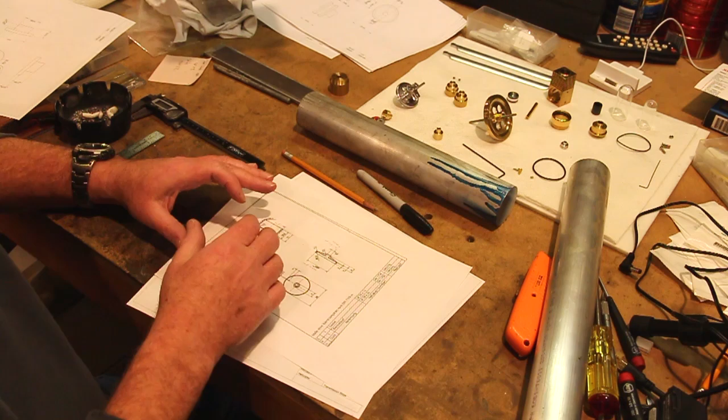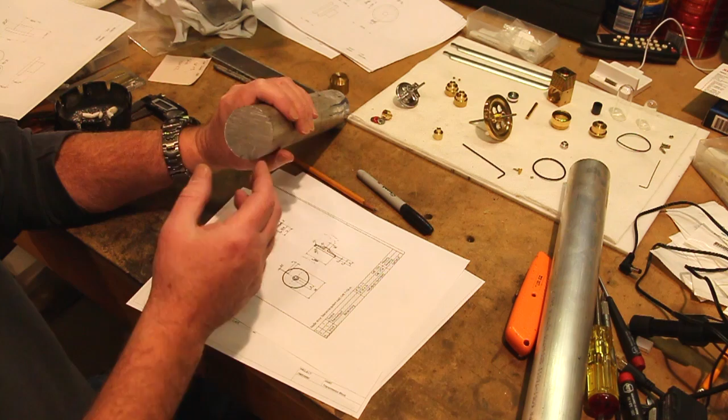The next thing I think we'll work on is a little pot that contains the isopropyl alcohol, which causes the heat, which makes the engine work. The last time I made one of these for a different project, I started out with a big, thick block of aluminum, and I bored out like 90% of it to make a dish. It's not going to be very big. But anyway, you're removing, like I said, about 90% of the material.

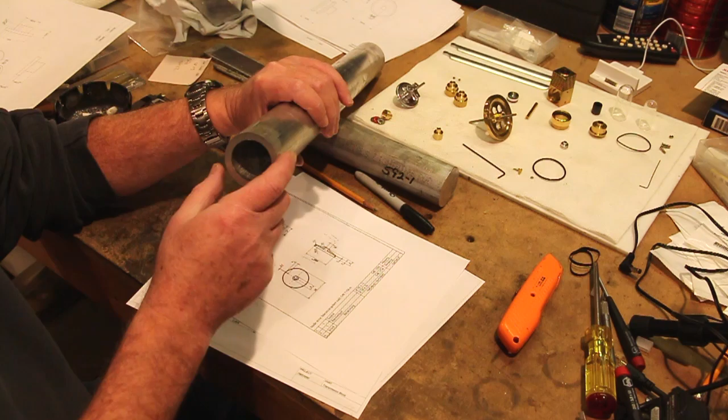So this time around, I have this cylinder, a large length of it, left over from another project. And what I'm thinking is to use this instead for the main body. But then, of course, you need a bottom on this thing. So what I'm thinking of doing is cutting a slice off here, and making it such that it fits and plugs the bottom of this, and then facing it and so forth. So anyway, we'd have a bottom.

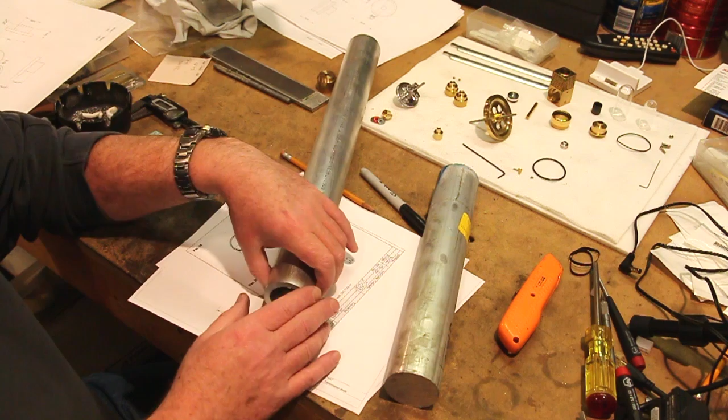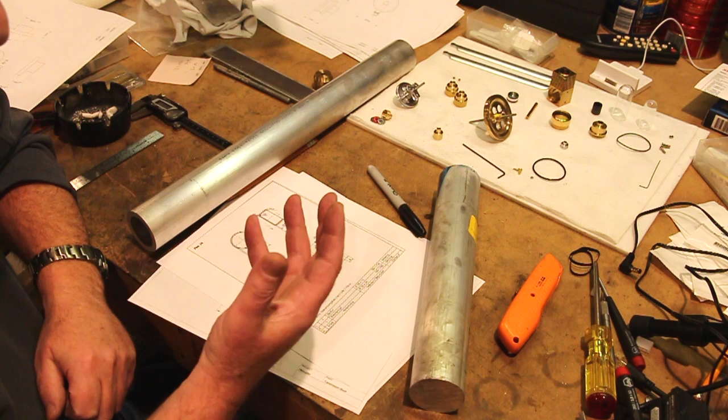And then when that's all done, assuming that all works, we have to make a top. The plans call for the top to have a bit of an upward taper to it. So I would make that out of this as well. And then, of course, there's a hole drilled through it where the wick comes up. So let me cut some of these down to size on the bandsaw, and then we'll head over to the lathe. And this is sort of just going to happen. I don't have a real plan in mind here, but sometimes I just work that way. So let's go see what happens.

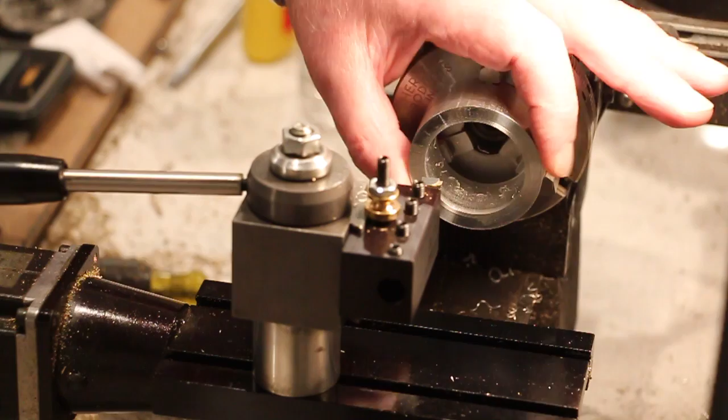Okay, I'm starting with the tube that will end up being the main body of the cup. I've faced both sides of it to make it square. And now the inside of this is the rough mill finish, and we don't want to leave it that way, so I've put my boring bar in here. And what I'm going to do now is just clean that inside surface. And the way I'll do that is I'm just going to jog the bit outward toward the edge until it touches. Just right there.

And now what I'm going to do is just make a few cleanup passes in and out. We'll use some cutting fluid. I'm going to jog out about, let's try 4/1000ths on the first cut. Now that's 8/1000ths off the diameter.

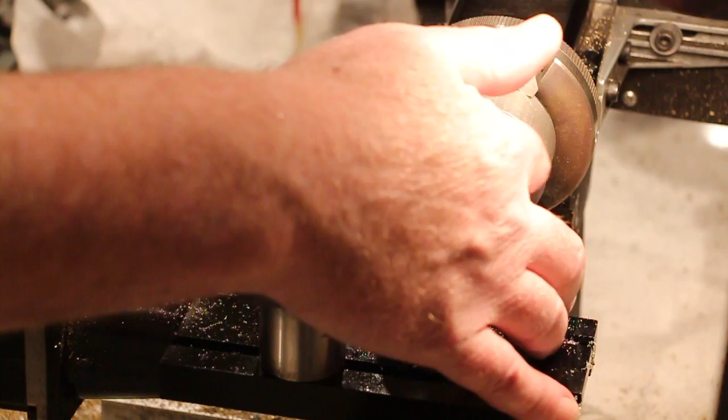Yeah, now, I doubt you can see that, but we have again removed some more material. It's just a little bit, but if you were trying to get a very tight tolerance, spring passes are removing, I don't know how little they're removing, but they are removing material. All right, well, that's certainly a nice enough finish for the inside of an alcohol pot.

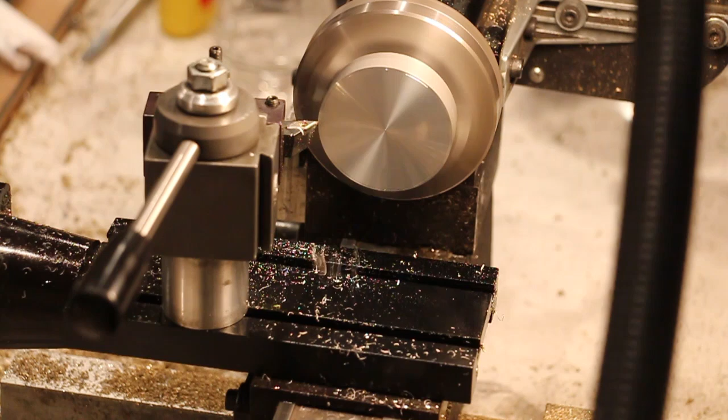So I guess the next thing to do is measure that inside diameter. Because what I'm thinking of doing is, for the piece that I'm going to use for the plug to make the bottom, we'll machine a shoulder into here and bring that down to the diameter that just force fits itself into there. And then we'll just press fit these together, probably with some epoxy. And then once that's done, we can remove all the excess, because we don't need a bottom this thick. I just needed something to hold on to. So let me take some measurements, and then I'll put this piece in, and I'll face it, and then we can start cutting the shoulder that'll fit in there.

All right, I've faced off both sides of this blank. That's going to be the bottom of the pot. And I've switched over to my turning tool. And then what I'm going to do is jog in just until I touch the face there. I'll set that as Z0. Now what I'm going to do is touch off in X.

Which is right there, and I'm going to mark that as X2 because the nominal diameter of this blank is 2 inches. What I'll do now, as you've seen me do before, is turn this down until it's round, then take a measurement and set the DRO to where we really are.

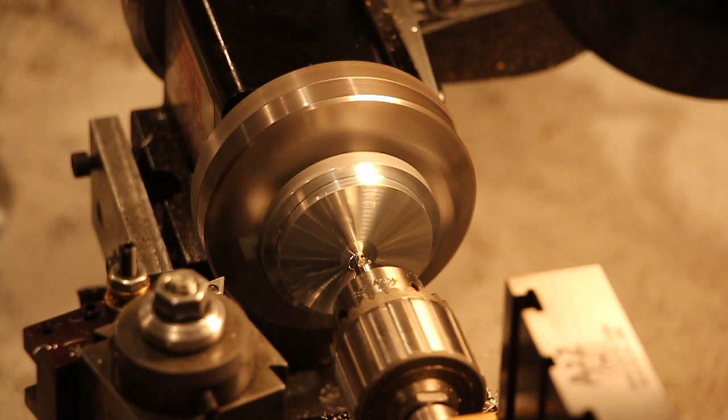Snug. Which is better than the alternative, being too loose.

Looks like we're about, I don't know, close to about 8 thousandths too big. So let's see what we can do about that. Alright, that's where the G code thinks we left off. So just take off a couple of thousandths.

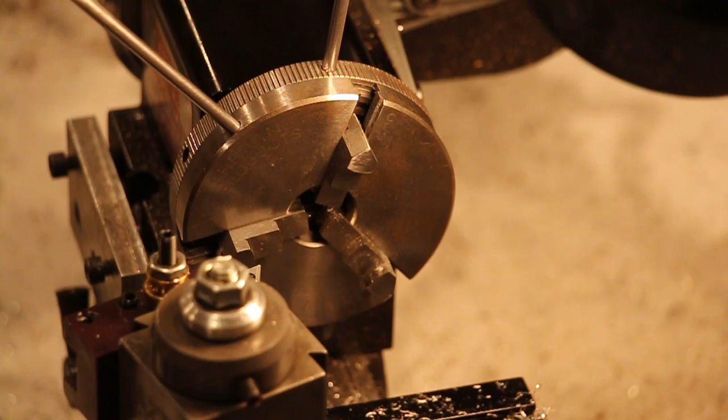Turning it down to about there, which is minus 1.12. This is just seat of the pants metalworking here. Just finding X here. Touch off. Right there.

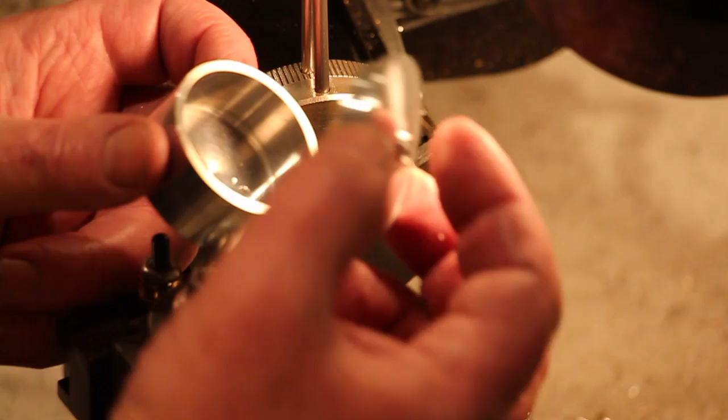All right, well, it certainly looks a lot more delicate, if you will. I still haven't decided if I want to make it just a little thinner than that. I mean, at this point, we're talking just totally aesthetic. And no one's ever going to see the inside because there'll be a top on here, so yeah, we'll probably just leave it like this.

All right, I'm still deciding what to do next. The thing is way too deep, and I'm going to have to cut some of that off. And then obviously we've got to flip it over and remove this big hunky chunk from the bottom. I think I'm going to need some time to stare at this and think about what to do next. So hang in there, I'll get back to you.

After thinking about it, I decided the best approach is to first remove this big chunk here from the bottom by facing that off, and then sanding the part. And because we're using the reversible jaws I mentioned, when they're in the reverse position they don't mar the finish. We can take the sanded part, flip it, and then remove the excess depth here. Then that should finish this piece, and then we'll go make the top for it.

So this will take a while, so I'm not going to make you sit through it. I, on the other hand, do have to sit through it. So I'll bring you back when we get through that. All right, I removed the big chunk that was sitting here. What's left now?

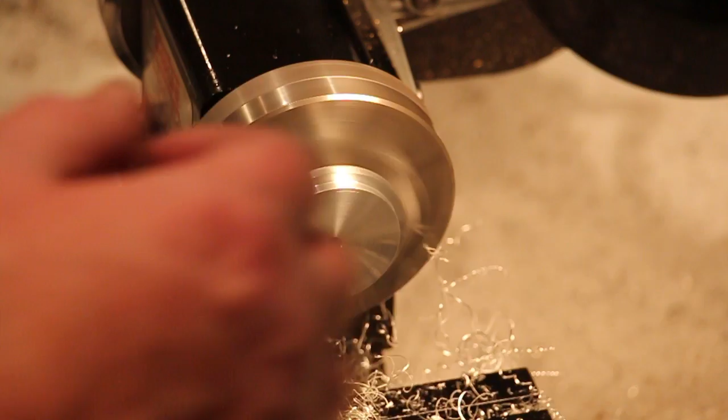When we made the plug for the bottom, we cut a step into it and recessed it into the tube. But there's still a fair amount of meat here that isn't serving any purpose. So I'm going to remove a tenth of an inch from this.

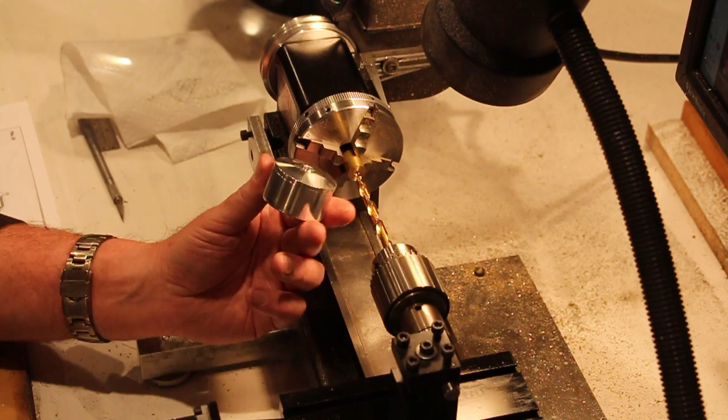All right. Well, the cup that holds the fuel is finished now. It's all sanded and stuff, and it's funny, I don't know. I look at this, and I remember how much stock we started with, and it's just incredible what we went through to get down to this little piece, but anyway, it looks nice.

So what I'm starting to do now is make the top for it. I've already faced it, but the next thing I want to do is bring it down to the same diameter as the cup. So I'll do that first.